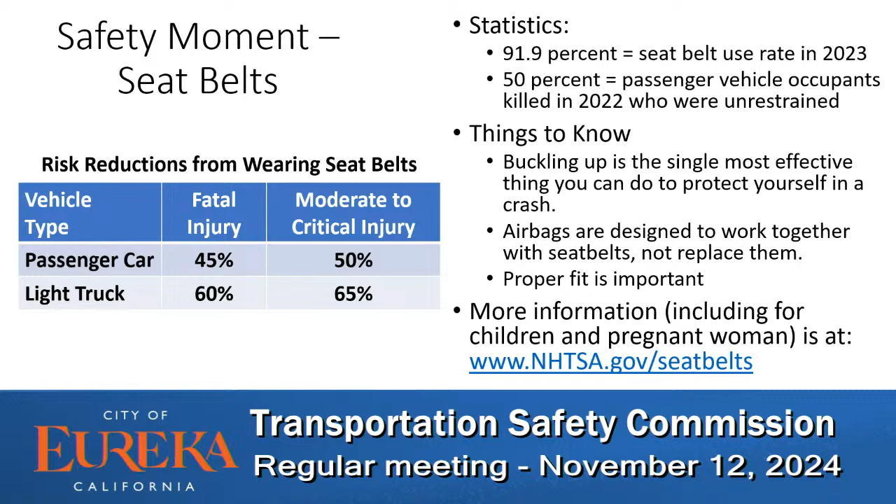Risk reductions from wearing your seatbelts are quite large. For passenger cars, they range from 45 to 50% for fatal or injury collisions, and for pickup trucks it's even larger, 60 to 65% reductions.

So things to know: buckling up is the single most effective thing you can do to protect yourself. Airbags are designed to work in concert with seatbelts, they do not replace seatbelts. Proper fit is important, and there's a lot more information at that website, including for women, pregnant women, and children.

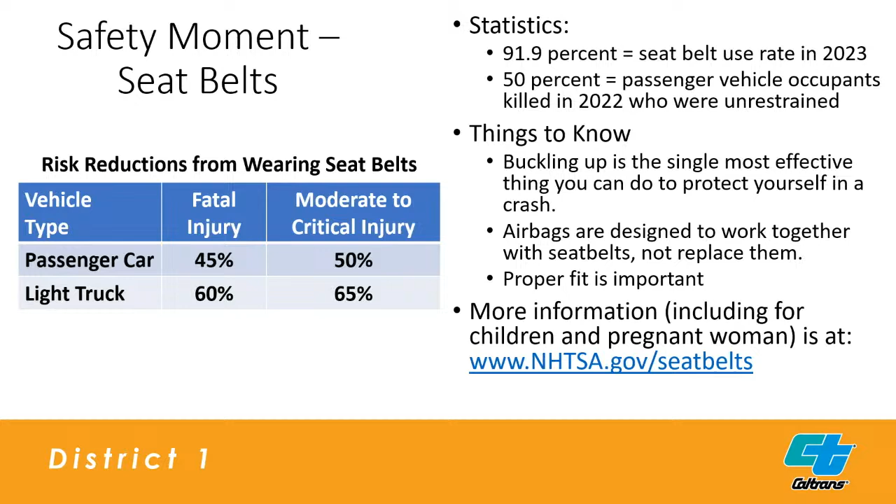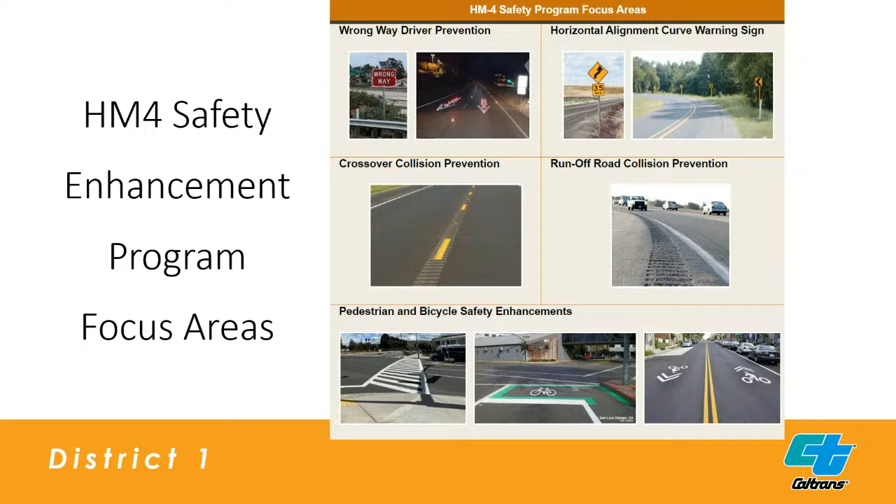So the HM4 safety program is essentially the Caltrans version of a quick build program. It has 5 focal areas: wrong way driver prevention, horizontal curve warning signs, crossover collision prevention, runoff road prevention, and bicycle and pedestrian safety enhancements. Those are what I'm going to be talking about today, as well as some other things.

The HM4 safety program, because it's a quick build program, has a very short lead time. From concept to construction is 2 years, which is lightning fast for Caltrans. This is a new program, about 2 years old. A typical Caltrans project takes 10 years.

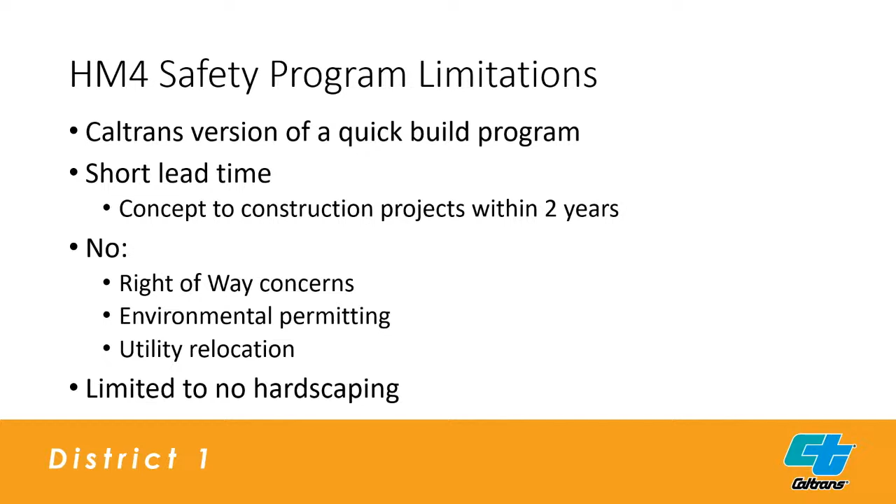So to squeeze it down into a 2-year time frame, some limitations apply. We can't do anything that requires right-of-way, environmental permitting, or utility relocation. Hardscaping is difficult, if not impossible—things with concrete, say. So what does that leave us? Signs, striping, pavement marking, and channelizers, which are those flexible plastic posts we stick along the roadways. That might not sound like much, but you can do quite a bit. It's quite powerful.

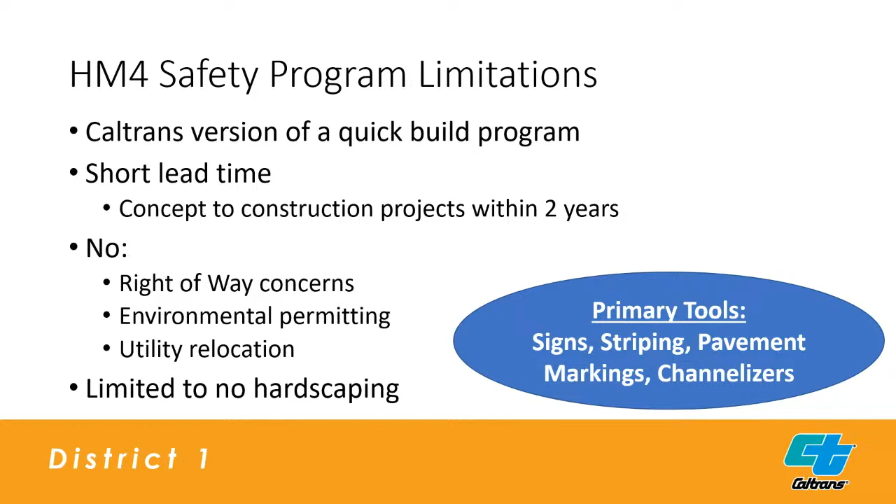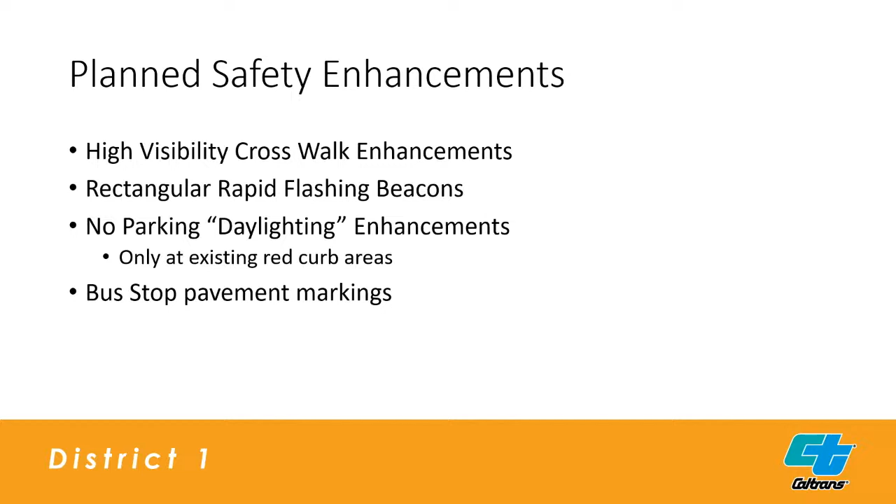We have several planned safety enhancements. We're doing high visibility crosswalk enhancements. We're adding some rectangular rapid flashing beacons. We're enhancing the no parking areas. And we're going to put some pavement markings in front of the bus stops.

So we'll start with the crosswalks. There's different styles of crosswalks, and on the 4th and 5th corridor we're going to be consistent and use the ladder style. You will have seen this on 4th and 5th Street already—all the currently marked crosswalks on 5th Street are the ladder style.

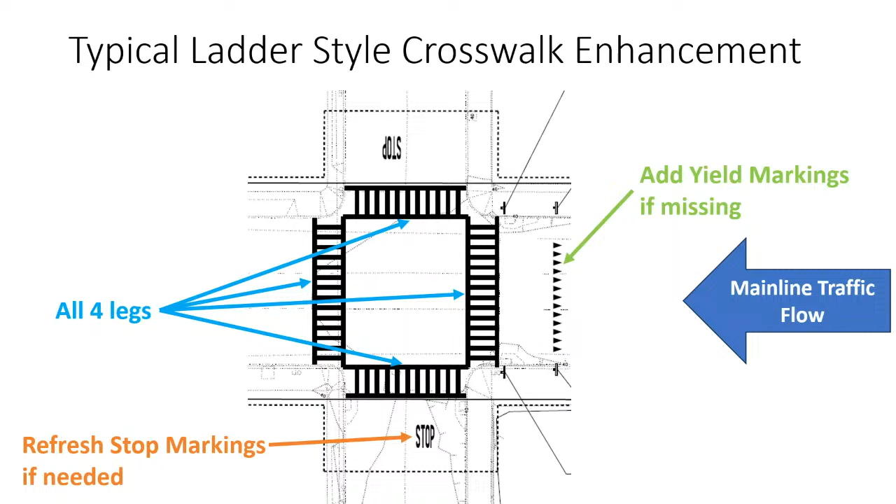For this project, we will be marking all 4 legs with the ladder style crosswalks, including the downstream legs, which are often unmarked currently. And if the advanced yield markings are missing, we will be adding those as well. Then for the minor legs, the stop pavement markings will be refreshed as needed.

There's the new California daylighting law that talks about needing 20 feet in front of any marked or unmarked crosswalk for visibility, and that begins January 1st.

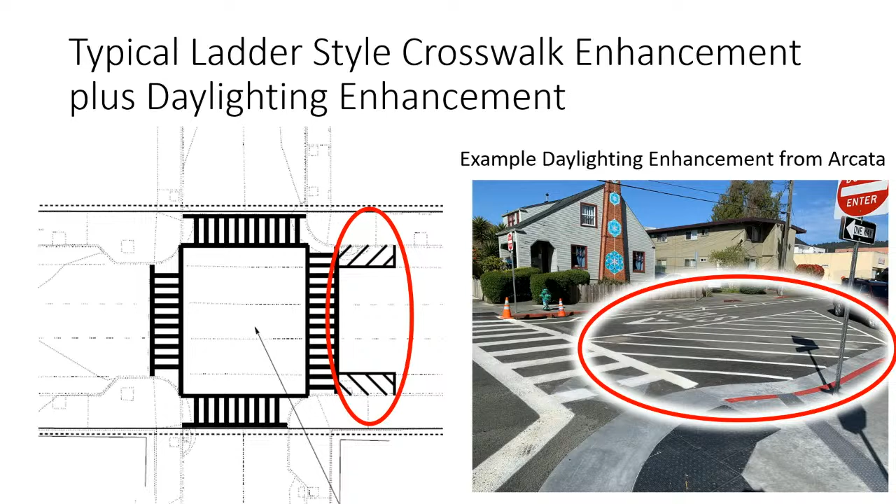And then lastly, we have several bus stops on 4th and 5th, and they have a little sign and red curbing. All we're proposing to do is put a pavement marking, just white text on the ground that says bus only, just to reinforce that that is a bus stop.

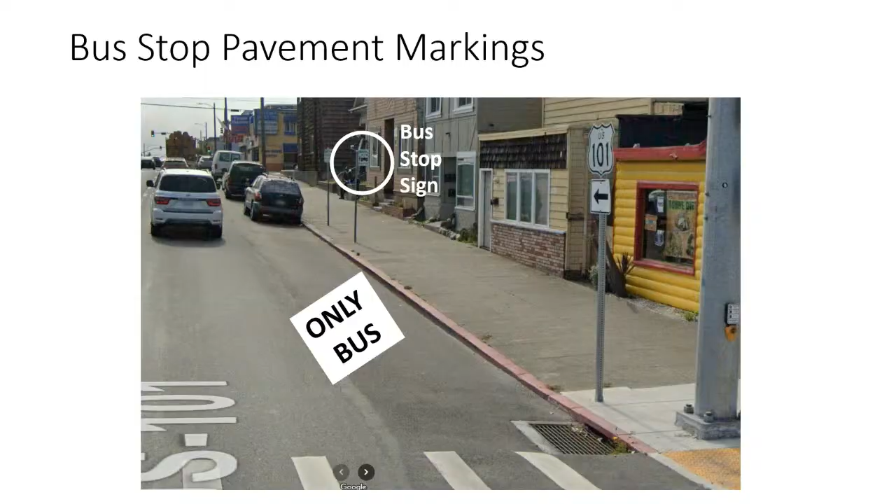We've circulated the draft plans to the city and HTA, and those draft comments on those draft plans are due today. We want to finalize the bid package this December, coming up very soon, and then construction is planned for next summer or fall timeframe. And that is all I have.

About the hazardous waste, I have two questions. One is, can you say more about how a sign could lead to hazardous waste? And my other question is, is this flashing like the one in front of the movie theater now?

No. The one in front of the movie theater is called a pedestrian hybrid beacon, and it uses red flashing lights that are a regulatory stop. A rapid flashing beacon does not force anybody to stop. It's just your crosswalk sign, your pedestrian sign there, and then see that yellow, there's two lights below it. One flashes here and it goes back and forth, left and right.

Is that like the one flashing on Harris with a push button? I know Harris isn't your jurisdiction, right? But Harris has that push button. Yeah, it would be like the one by Ramones or the one by Winco.

My question was, my sense is if it just was always flashing. No, it's only when the pedestrian pushes the button. Good, thank you. And then the hazardous waste question.

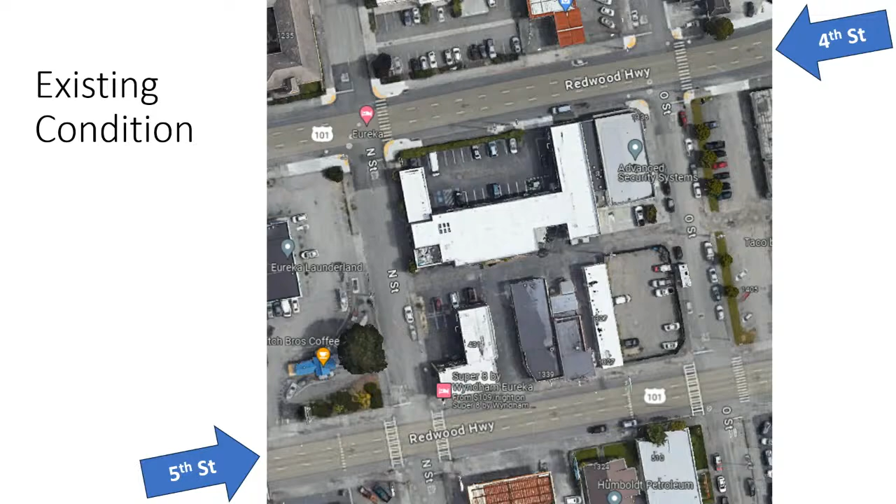I actually one day even called in a Caltrans vehicle that did not stop when I was trying to step off the curb. I would have to give credit to the log truck drivers, though, they always stop, they're extremely courteous. And after the big earthquake, we had a bunch of Canadian lineman crews who were angels. I emailed their company because they were so great about stopping and letting me cross.

So I don't believe that an RRFB is sufficient at that intersection, because when I'm crossing the street with this high-vis vest, waving a flashing traffic wand and blowing an air horn, and people still will not stop, they see me, they hear me. I do not believe that a non-regulatory signal is going to be sufficient.

I have coworkers who alter their routes to work or alter their means of traveling because they do not feel safe crossing 4th and 5th. I have a coworker who normally bikes to work, but if she has a day where she doesn't feel like biking, or isn't feeling well, she takes a taxi specifically because she does not feel safe crossing 4th and 5th from the bus stop.

So I know, I Googled it to make sure, there are solar-powered hawk signals available. Why is that not on the table?

A hawk, or pedestrian hybrid beacon, we likely wouldn't do solar powered, but even if it were, it requires much more infrastructure. It requires much bigger digging of holes, and so right now a pedestrian hybrid beacon is out of the scope of this particular type of project funding.

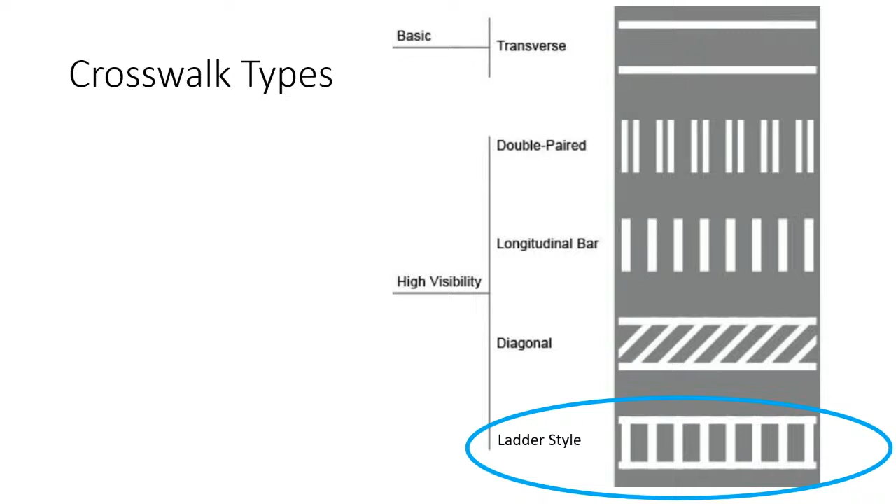So we're doing - in terms of the crosswalks, we are doing all intersections. Okay. I'm looking for the beacons.

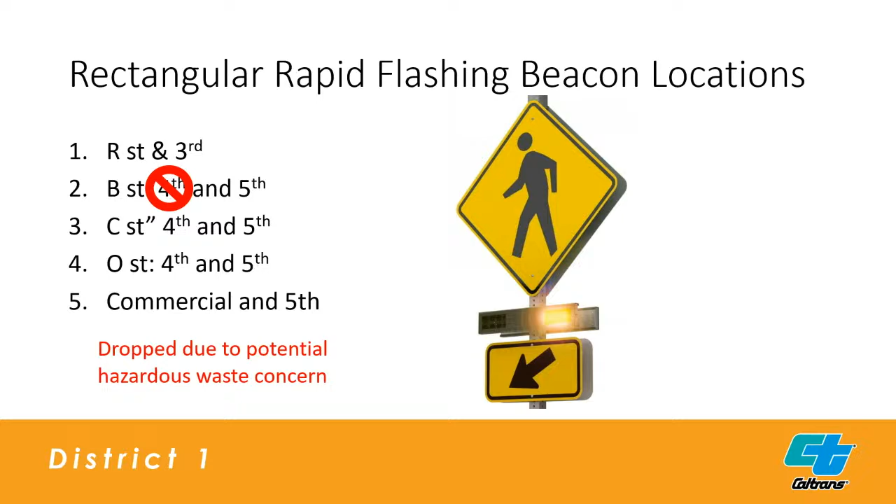The beacons are at RCO and commercial. And will they have - is it just the post with the flashers on it, or will there actually be the lights embedded in the crosswalk like we have in some places here in Eureka? It will just be the posts with the signs and the flashing beacon on the sign. We will not be putting in the in-pavement flashing lights.

Okay, cool. It's a bummer. I really appreciate that work is being done in this area. I walk down here as well and bike a lot, and I also walk in other areas of the city where we do have those flashing beacons, and I have the same experience, where I push the button and then I just sit there and wait, and still nobody really stops, and I still have to wait till that moment where I can dart through like Frogger style. I think they are better than nothing, but there definitely needs to be something done to shift driver culture, because that is an area where a lot of people cross because they have no other option.

But I do really appreciate this - this is lightning fast in terms of what Caltrans usually does. So this is what we can do now, and it's an improvement over what's there.

And discussions have started on longer term solutions.

You did say the deadline for comments was today, and the city put together comments. Is there anything you'd like to share with us? We didn't have a lot of comments. Let me check if Jay had anything last minute. Yeah, we did not have a lot of comments on this plan. Pretty straightforward. We've been talking along the way throughout the process when they were developing the plans, especially trying to finalize the work on 5th Street, to incorporate some of these things ahead of this project.

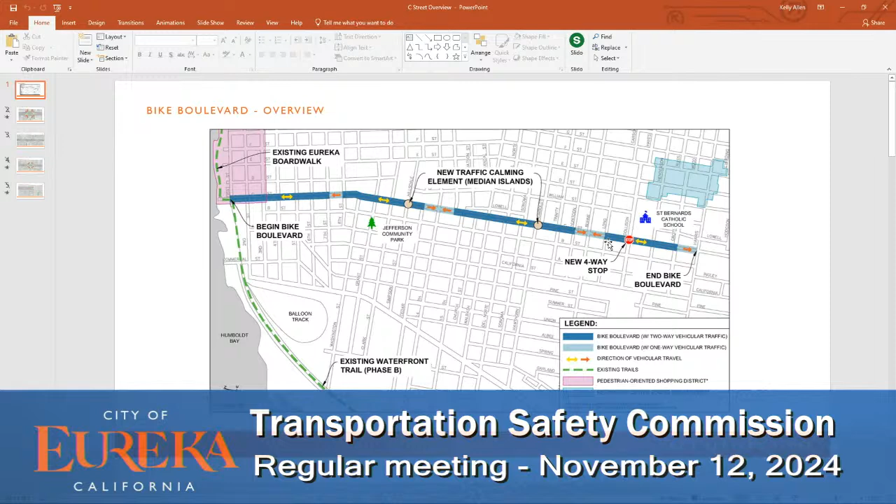The intent of the project was to establish a north-south, community-level, lower traffic stress corridor from the Old Town area down to near Henderson Center to the south. When we talk about a low level of traffic stress, we mean trying to limit or reduce traffic volumes on certain sections to allow for a lower level of perceived stress, so there are fewer vehicles zooming around or moving quickly through, getting at local traffic only through a majority of the section, let's say from 7th Street to the south.

Because if you go from 7th Street to the north, you get into more of the Old Town area where it's a little more difficult to constrain vehicle movements. So today we wanted to present a high-level look at what the intersection improvements would look like that would change the volume of traffic in the corridor.

I'll start by describing what's on the screen in front of you now. On the left-hand side, that's north up. The project starts at 1st and C Street, at the Madaket Plaza, where the waterfront trail segment that runs to the west terminates, and the boardwalk continues on out along the waterfront.

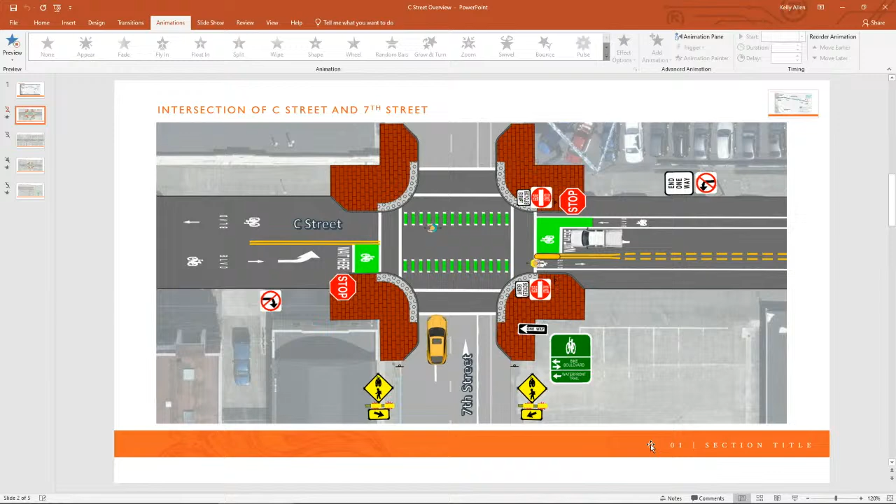I have an animation here that may or may not work, so let's make a run at this and see. This shows bicycle traffic coming up, entering bike boxes, and rapid flashing beacons going off as cars pull through. The beacons would be cyclist-activated, where they could wheel up and push the button to activate the beacon, stopping or at least alerting traffic to their presence as they're making their crossing.

So it's not a full red stop like we talked about previously, but it alerts much more than is currently there that somebody's crossing, and really tries to grab traffic's attention.

Our next treatment, and there are a couple of these locations, is at Simpson and Hillsdale intersecting with C Street. In its current configuration, you're seeing these raised median islands in the middle of the intersection, but these don't exist currently — it's just a regular street going through there.

So this would try to eliminate diagonal movements across the traffic lanes and keep it more in line. If somebody's coming west on Hillsdale, they could still take a right onto C Street and then a left onto Simpson — they just wouldn't be able to cut the corner through there.

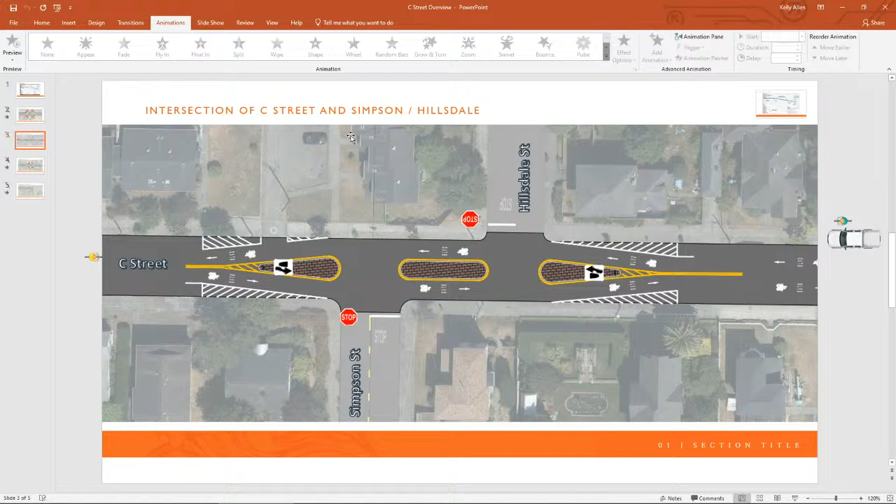Let's see if we have a preview here. Yeah, see, they're not all going to work. All right, well, we'll keep moving on. These animations were put together by somebody previously on our team who's no longer with us, and we were having struggles to get them to run correctly, so we'll keep trying.

All right, so 14th and C is the next intersection, and this is another type of tool we're using here. Rather than like at 7th and C, where there was a one-way on one leg, in this case it's one-way on two legs. So if you're traveling on 14th Street and want to get to C Street, you're not going to be able to pull through in either direction here.

Again, if somebody lives in the neighborhood, or is visiting somebody in the neighborhood, or has a local destination, they can still go a block up or a block before and come in to that location — they just won't be able to directly run through there.

Let's see if we can get this one to work. Here we go — so we've got cyclists entering from north and south, stopping, activating the beacons. Continuing through, they have to make a crossing movement to get lined up with the direction they're going. Vehicles still come out and make turning movements, but they're queued up differently — they have to stop behind the bike box.

The cyclists are able to move through first and be visible out in front, really trying to make them as visible and prominent as possible, while also reducing the amount of traffic flow in and out of C Street.

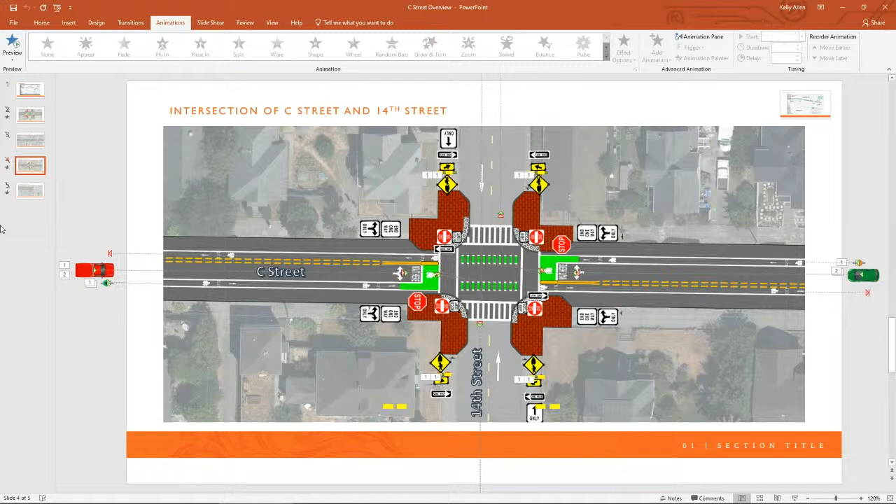And finally, this is another one of the one-ways at Harris Street. We have a number of these other different configurations that I just mentioned. There's a few other places throughout, and we can go back to the original slide and look at those once we're done here. But this one, again, is trying to limit the inbound traffic coming off of Harris onto C Street, to reduce traffic volumes, and also identify more signage and striping, pavement markings on the ground to delineate where cyclists are and make them visible. It makes it apparent to cyclists and vehicles where people are in relation to the roadway when making turning movements, to make it as clear as possible.

So to go back up and look at the overview, on 7th Street we have the limit of one-way traffic at 7th and C. We have two traffic calming island elements, where we have two offset intersections on this section of C Street. One is at Hillsdale, like the one we looked at. There's another one at Humboldt, and those installations are very similar. Then at 14th Street, we saw where we limit traffic coming off 14th Street from entering into C Street. And at Boone, it's a similar configuration to 14th Street, again limiting traffic coming off of Boone onto C Street.

And I think that is about it. Again, this project is in design right now. Our design plans aren't very fun to look at, and they're not far enough along, so these are kind of basic, but hopefully they give you a better idea of what some of those improvements are.

I didn't check this one to see if we had a preview, but we can give that a run here. Oh, look at this, we can make it happen. Sorry to jump around.

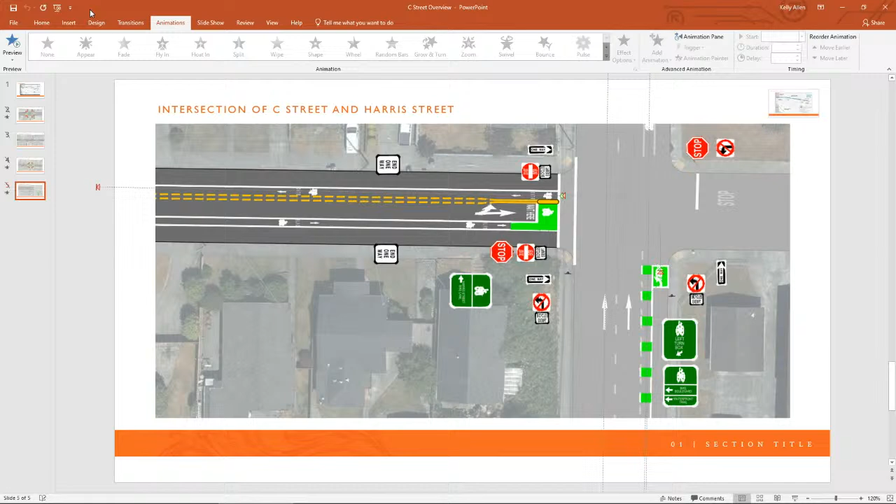So with that, I'll bring it back to the overview and see if you guys had any questions.

Questions, anybody? Allison, yeah? I was curious about the calming element median islands—is that going to just be pavement, or is it? I know it's sort of draft level, but will there be plants, or something so it's not easy to just skip over?

Yeah, so for this project we went after active transportation program funding, and we're able to have funding for raised curb islands. So these will be hard raised curb islands—they'll be prominent, they'll stick out, not just painted or symbolized or delineators on the ground. That'll be a hard surface.

Thank you for the report. On the median islands, they're kind of not that attractive, and I noticed Eureka doesn't really have any. I just came back from Mexico where there are roundabouts everywhere, and those are a little more attractive. I wonder, has that ever been looked at? Because that could also solve the issue of calming traffic and distributing drivers better in those kinds of intersections where we're trying to prevent them from doing crazy stuff. So has that ever been considered in Eureka?

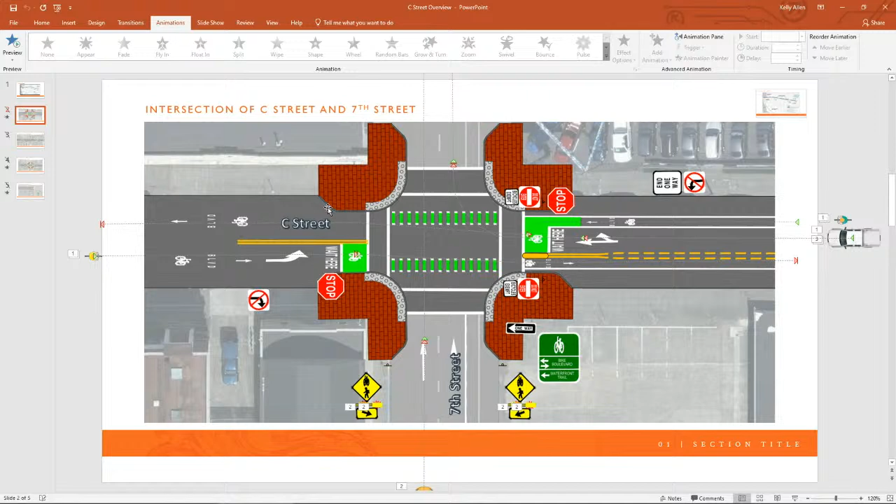And then if you're on a bike, like if you're pulling out into a bike box, you'd have to activate it and then move up and over. When it comes to, for example, here you might have an activation button on the curb line that you could activate before you pull out, to get in the zone you need to be in and able to make your movement at the intersection. Okay, I guess we'll see how that goes.

And then what public education do we have planned for these changes? Because I know people have been very confused by the H and I Street stuff. The Harris and I intersection where it goes from one way to two way, people have problems with that, and it's been that way as long as I can remember. So what are we going to do to get drivers aware that these changes are coming and how they're going to cope with them and what they're supposed to do?

Yeah, I think we definitely are going to put out, it's kind of two fronts there. One is the education component you mentioned, and I think we were a little slow to the trigger on getting some of those out on H and I, so we can be better about that, and we will, and get out some information on the website that you can point people to that shows them how to navigate this, whether you're in a vehicle or a cyclist navigating some of these things that are new for the city of Eureka, right? Like maybe people haven't, if we don't have it here in the city, maybe they haven't been somewhere else to ride on it. So we definitely want to make that stuff available for them on our website.

And then I think there's also another component we'll be adding into our bid process: early notification of when things are coming, trying to get out at the very least a month ahead. Our intent right now is to use a portable changeable message sign board to alert people of changes to the roadway configuration, and try to get them pointed in the right direction to get information back to that educational information. So in the area, really trying to make it apparent that it's coming and where to go get information.

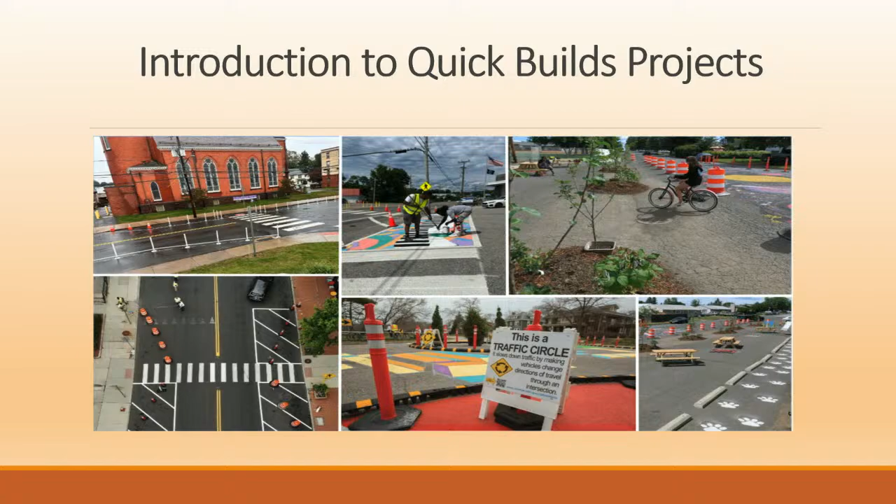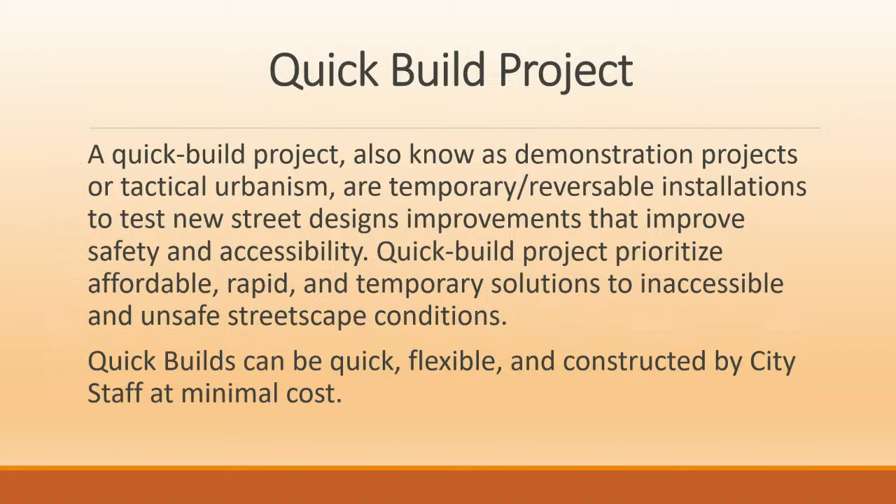On our next slide, we have a definition of quick build projects, which we've been discussing with Caltrans just recently with the C Street project. By rethinking streets, city staff can deliver better economic performance, new transportation choices, and a higher quality of life when implemented correctly. Quick builds can also be quick, flexible, and constructed by city staff at minimal cost—very beneficial to keep it in-house in the engineering and public works department, to come up with concepts, locations, and implement.

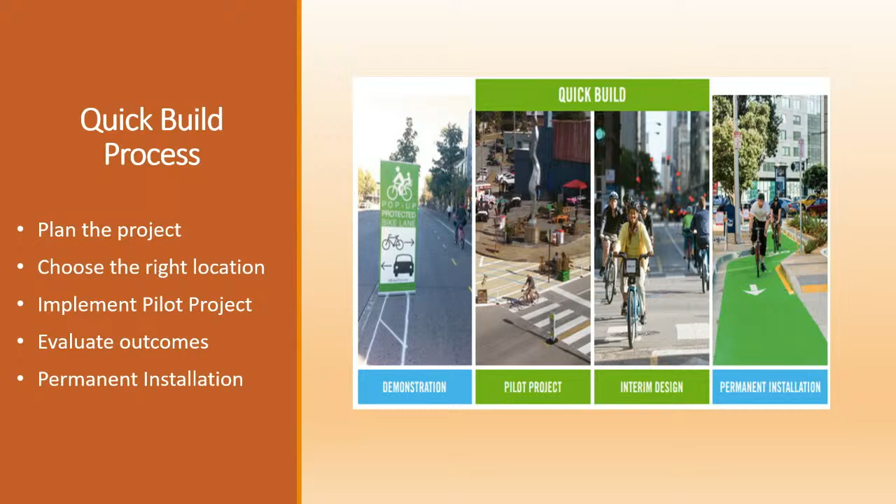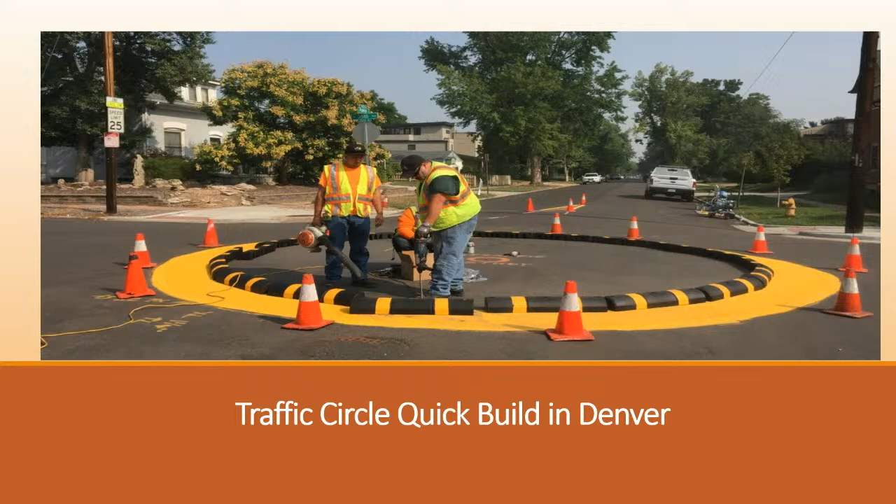This is a great example, as discussed earlier, of a traffic circle or roundabout using parking stops, paint, and cones in Denver. A great location, and these are popular quick build ideas that are being implemented.

I do notice some flowers there in those. Yes, very decorative.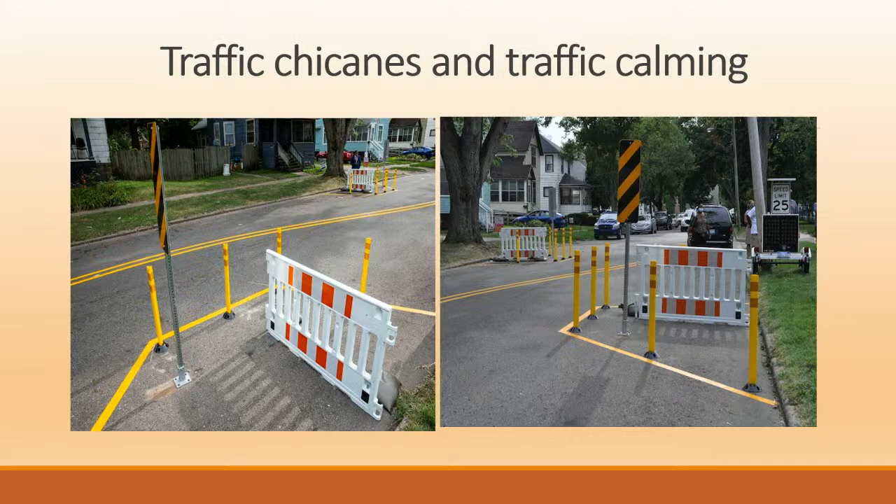And then just the conclusions and benefits of the quick build: it prioritizes affordable, rapid, and temporary solutions to inaccessible areas and unsafe streetscape conditions. As discussed throughout what we're using with Caltrans, there are multiple benefits, mainly speed. Our projects typically take multiple years, while quick builds can be anywhere between 18 to 24 months.

Okay, and with that, it was a pretty simple process when it comes to quick builds. If you have any questions, we can answer them now.

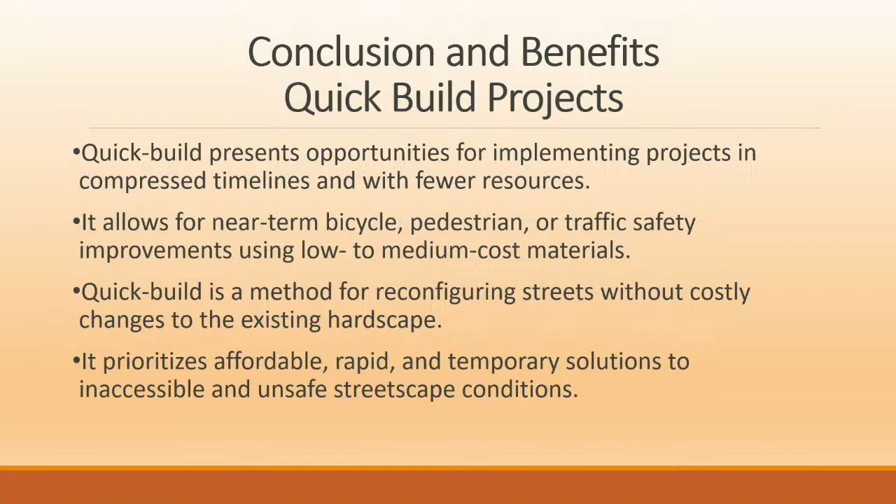Thank you. If these are existing infrastructure—right, like you guys presumably have a lot of these concrete blocks around and cones and paint and things like that—why does it still take 18 to 24 months to implement?

There are processes that we need to take. You need to go and develop a traffic control plan. It needs to be put through design, stamped, and approved. Hardscape or large projects, like the Caltrans project, typically could take 24 months. I think if we found a location here in the city, it shouldn't take a full 24 months—it might be between 12 and 18 months, but there are still steps we have to take to make sure the city is not held liable for any construction implemented in our network.

So we could definitely, likely, beat those types of timeframes like Jay was mentioning. We are working—we have our subcommittee here on our neighborhood streets, that's a quick build type project there. So there's definitely still time needed to get a pilot project like that up and running. Not to mention, anything we'd put out there we'd most likely still have to bring here and introduce and move it forward in some cases.